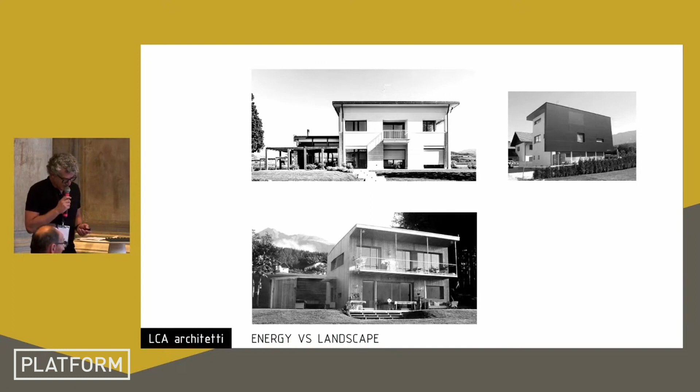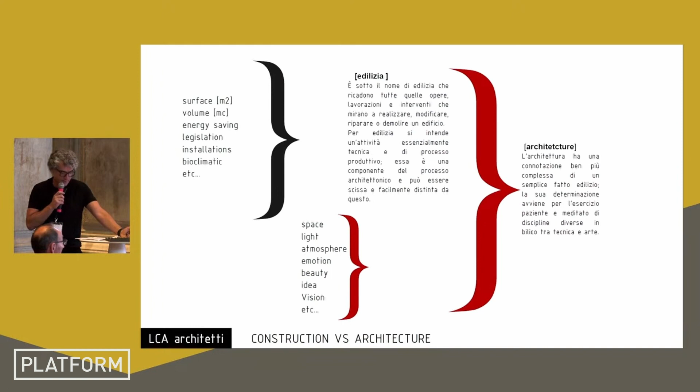These buildings were similar to each other from small to big scale, and the context and the architecture become secondary matters. For this reason, construction needs, of course, square meters, cube meters, energy, surface, but architecture needs other things: space, light, emotion, poetry.

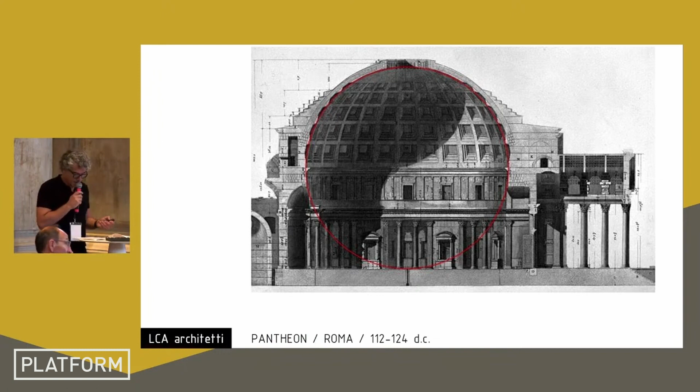When we visit real architecture for the first time, our thought goes to amazing beauty. Only after, a lot of time after, we think about the walls, the stratigraphies, the energy, the conception. But what is in the architecture? What is new in architecture today?

There is a very simple concept. For the first time, in July 1969, man took a photo of our planet from the moon and realized the Earth had borders. And realizing this directly with your eyes, that this planet could offer only limited resources. So we need to continue to make good architecture, but doing so with natural materials and energy that come from renewable resources.

Now I'll talk about my project, Chalet, a small sustainable hotel built in the shadow of Cervino. When we design a new building, we always deal with the context. And the first question is, what landscape marks Cervinia and the Alps more in general?

When we think about the mountains, about the Alps, we think about a bucolic landscape, like Heidi. Do you know Heidi? Made of nature and clean air. But all the Alps are similar to an archipelago surrounded by the sea. The landscape is so much various and complex.

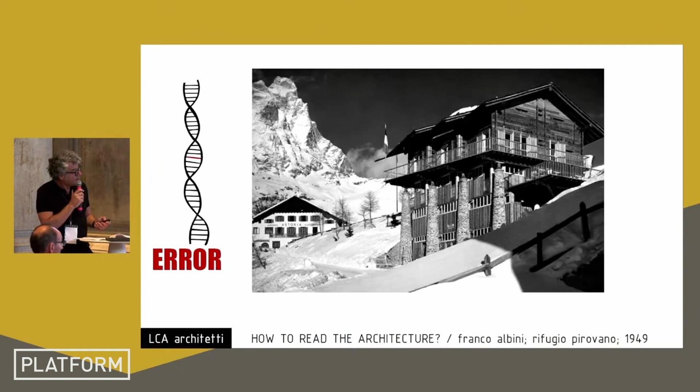I believe in a Darwinian architecture. Darwin pointed out that evolution is in the mistake. One infinitesimal variation of DNA can provoke disaster or start a positive evolutionary challenge. If the normal rule of DNA is this, I prefer to work on the error.

And as you can tell, the landscape didn't give me a simple answer. In fact, we worked trying to find other references. Among these references, the most interesting and real one was about the population, Walser, the Alps colonizer.

Walser were a nomad population that conquered various parts of the Alpine territory, adapting themselves to the freezing climate and hostile environment of the mountains. Their people started to build particularly interesting alpine architecture, opening up to a fixed construction technique that dealt with prefabrication with wood. In their houses there are three characteristic elements: a solid basement made of stone, a big box made of wood leaning on this basement, and a big central stube as the heating system of the house.

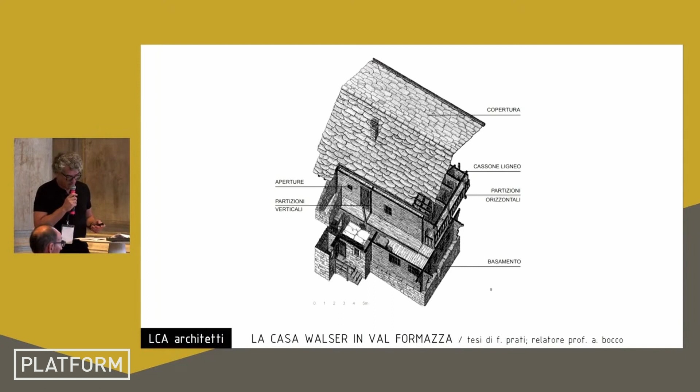We try to put together the technology and the constructive aspect with the harmony, deeply connected to our client, a classic ballet dancer.

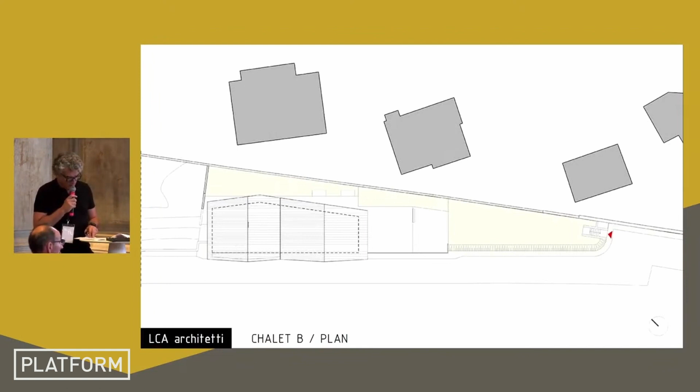Let's see the project in detail. In this slide, we can observe the place where we built Chalet B. It's about a very long and sloping narrow ground.

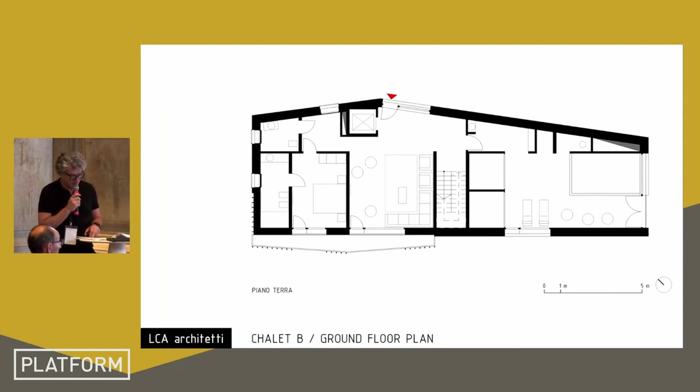The service plan of the basement has only the serving function, like a garage, technical locker, ski storage, etc. On the ground floor take place the principal entrance of the building, a disabled room, and the spa that faces the garden on the east side with hydromassage pool, sauna, bagno turco.

The first floor is the room floor. Every room is equipped with a private bath and terrace. The last floor, the second one, is an open space with a sharing kitchen, a big dining room, a living room, and a great chimney that reminds of the stube in the Walser architecture.

The main peculiarity of this plan is the terrace that is designed with a broken line in plan. The border evokes the style of the covering and the skyline of the surrounding mountains.

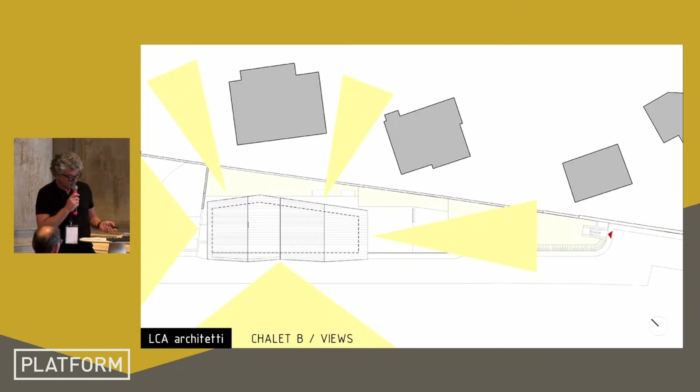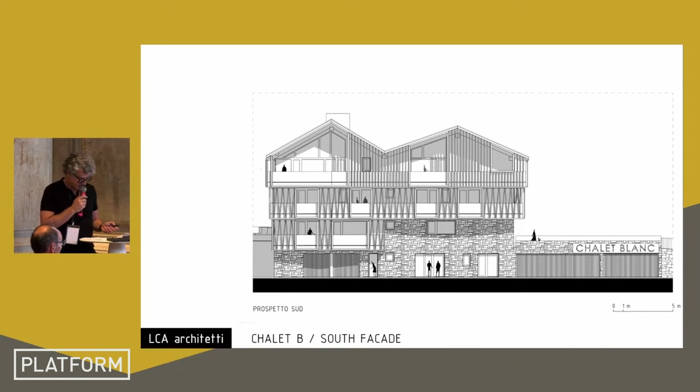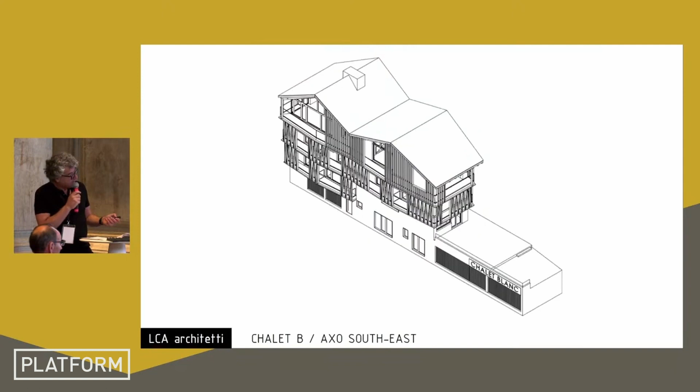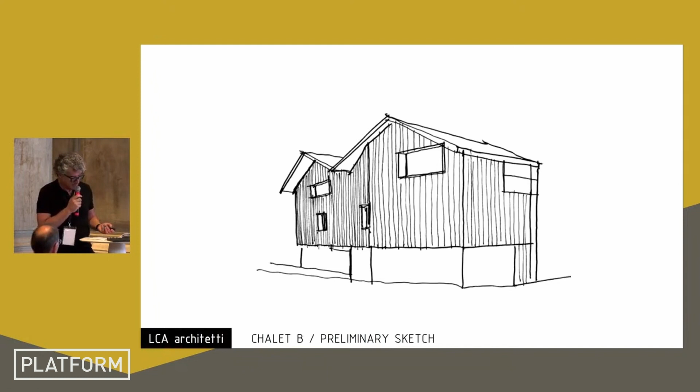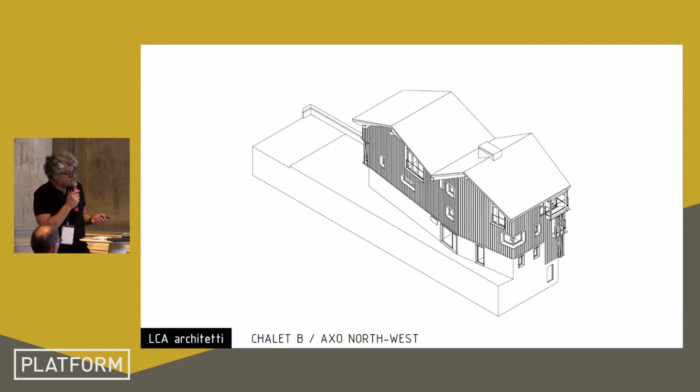Every opening is thought to frame a characteristic element of the landscape, thanks also to the drawing and the frame that are built on the external border of the terrace.

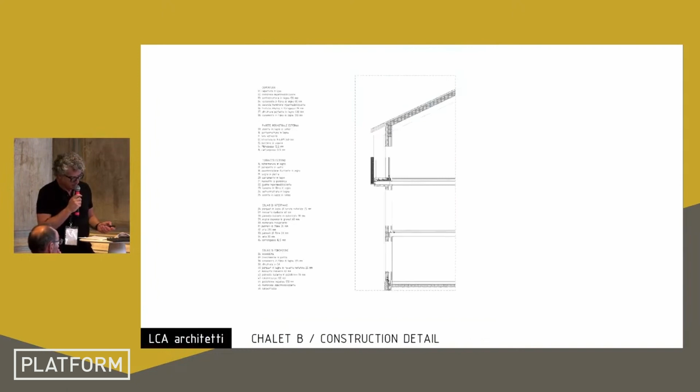And as I anticipated before, the building is built with natural materials. X-lam for the wall, for the structure, and stone for the wall on the basement floor.

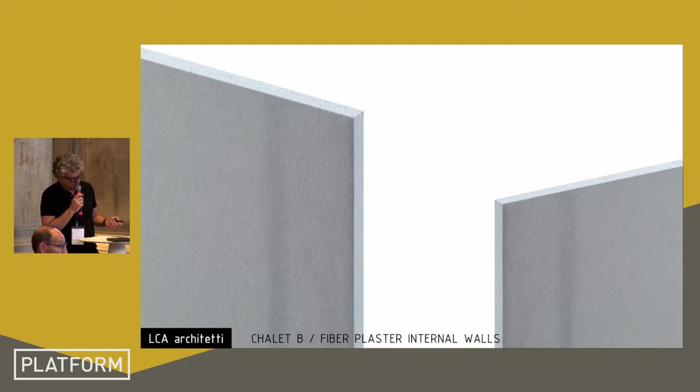See another detail. For the internal walls, the decision led to use natural fiber plaster isolated with hemp. For some elements, we use wrought iron, such as, for example, the great chimney inside.

This is a short story of the Chalet B project, bound with the great mountain called Cervino.